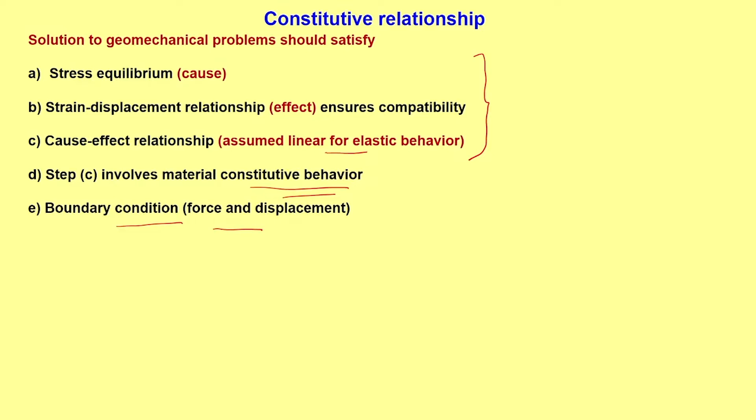Now, constitutive relationship in geomechanics is a cause-effect relationship. As I mentioned, it is an extension of the last lecture session. It is a relationship between stress and strain, or you can say it is a relationship between force acting on a material and the resulting displacement.

The real stress-strain relationship of soils or rocks may be complex in nature. Most of the time, everybody—engineer or non-engineer—will understand that soil is pretty complex and very hard to understand, and whatever we say, there will still be some gap left in our understanding. There is so much uncertainty associated with soil behavior.

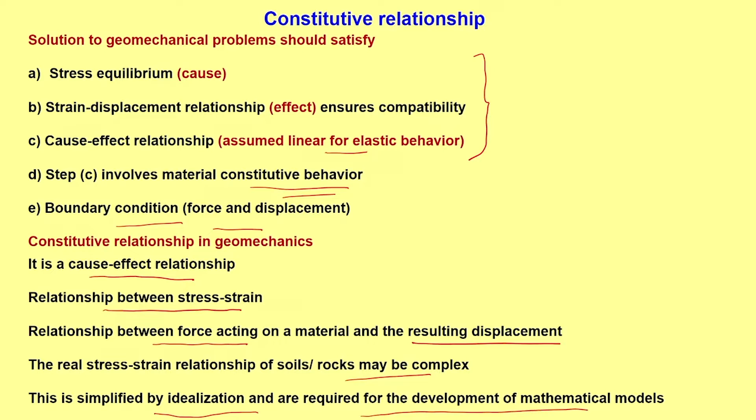So a real stress-strain behavior is beyond question. What we can do is understand or develop models which closely simulate real soil behavior, in a simplified way. We understand that it is complex, so through idealization, this relationship is simplified and required for the development of mathematical models.

So first, let us begin with a very simple model, which is linear elastic behavior. One may always ask why we should discuss linear elastic models at all in soil mechanics, because in most cases soil behaves non-linearly. But because of its simplicity, simple mathematical formulation, and minimal requirements, this model is very popular. So linear elastic model is where we always start, and there are specific problems which consider it to be elastic in nature.

Now, how far this is true is a question mark, but because of its simplicity and the fact that results are not really off, under certain circumstances we can even apply the linear elastic model for simulating the behavior of soils, but not always. It is far from reality.

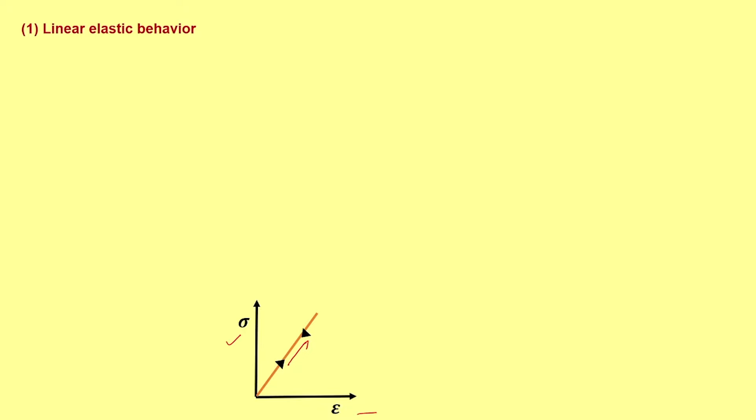So in the linear elastic model, the load results in stresses which are well within the yield limit. Now this is the point: if the loading acting on the soil is fairly less compared to its strength, we can still say that it is within the elastic limit, and this is the whole basis of the working stress method.

and the logic of applying factor of safety. We apply a high factor of safety and ensure that the stresses acting on that particular body or soil are well within, or at par with, or slightly below the elastic limit—or to be very specific in geomechanics, the yield limit.

Yield limit is the point beyond which plastic strain sets in, or plastic behavior starts happening. Let us mark up to this particular point. Now, if the same material is further loaded, it may exhibit non-linear behavior, so this point can be treated as the yield limit. We will come to that a bit later.

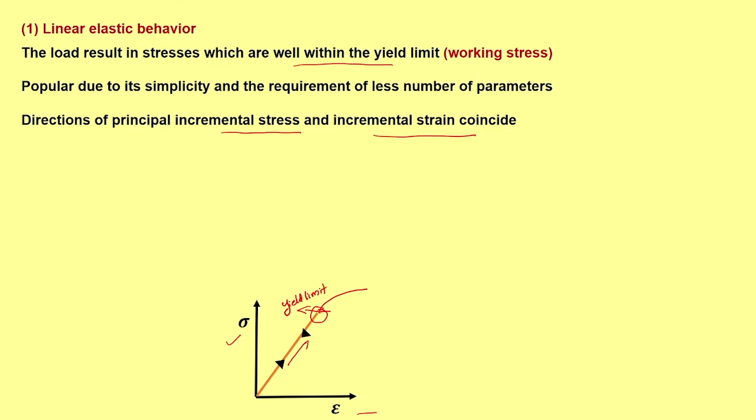There is an inherent assumption involved in most of these models: the directions of principal incremental stress and incremental strain coincide. That means the direction of the incremental stress is the same as the direction of the principal incremental strain. Now, when it comes to plastic formulations, it may or may not coincide. So there are various other elastic models, but in linear elastic models you have this inherent assumption that incremental stress and incremental strain are in the same direction.

Incremental, why incremental? We are talking about a very small increment of stresses; we will come to know why incremental is important a bit later. This model essentially corresponds to homogeneous, isotropic, low stress conditions. If we want to ensure it is a working stress condition, it has to be under low stress, with material parameters independent of stress level.

Considering this plot, the value of E remains constant up to this particular yield limit. Whatever the strain level, these are different levels of stress and different levels of strain. Whatever the stress and strain level, if the body is considered linear elastic in nature, the material parameters E and mu are considered constant, independent of stress level. So linear elastic models have only this requirement, and it essentially conforms to low stress conditions.

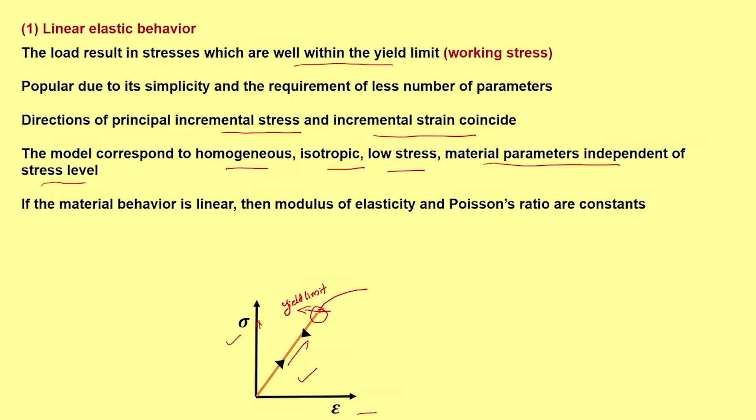If the material behavior is linear, the modulus of elasticity and Poisson's ratio are constants, as already discussed. So it does not simulate the important aspects of soil behavior. In the absence of other complex models, one can always use the linear elastic model, but with proper understanding that it will not simulate real soil behavior.

But this statement is not fully true. There are certain situations where soil exhibits some sort of elasticity, and one good example is an overconsolidated state where the soil is fairly stiff, and when stiff it can exhibit elasticity. Again, that elasticity is subject to certain conditions; beyond a certain point it again becomes subject to yield. So it is condition specific. It is not like other materials. For soils, what type of behavior it exhibits is also condition specific, and under certain conditions it can exhibit elastic behavior.

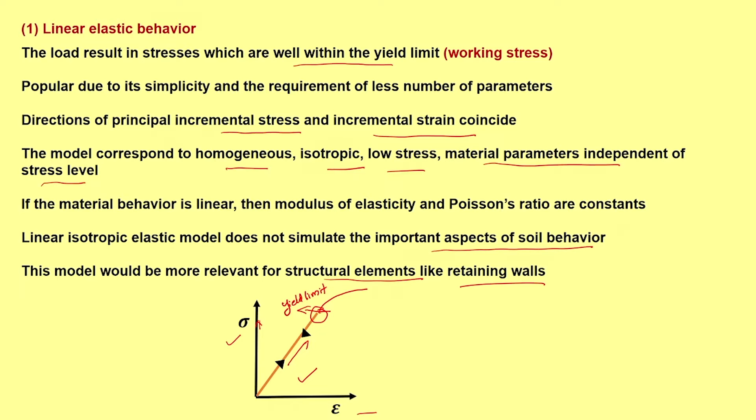So this model would be more relevant for structural elements like retaining walls, because retaining walls are very widely used and are an important aspect of geotechnical engineering. So for modeling those, linear elastic models may be important. Now we will go to some other extension of the linear elastic model.

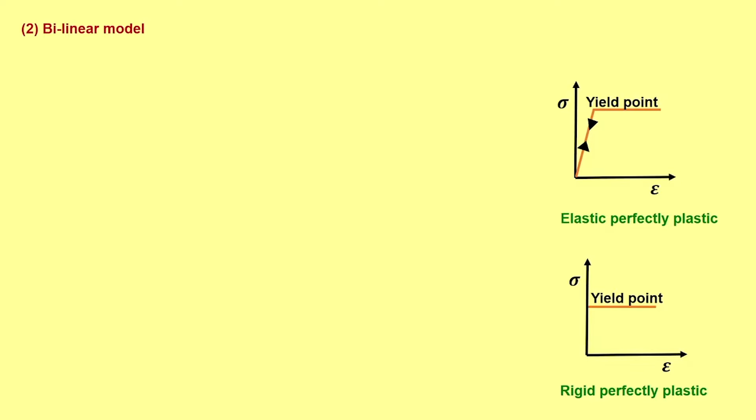Now we will come to the bilinear model. Bilinear models represent non-linearity, but you do some sort of adjustment, showing that non-linearity using two different lines - that is why it is called a bilinear model. Material behaves linear elastic until it reaches yield stress. We will discuss yielding and yield stress in detail in module 4, but here we just need to understand it is the point beyond which plastic behavior starts.

So material behaves linear elastic until it reaches yield stress, and then remains constant with strain. This means the stress-strain behavior follows a certain pattern until it reaches the yield limit or yield stress, beyond which it remains constant. Now this 'constant' depends upon the formulation, there will be some sort of changes - we will come to that in the discussion.

Material parameters remain constant till it reaches failure condition. So here we will discuss two bilinear models. The first one is elastic, perfectly plastic.

So you can see here that we are not talking only about elasticity. It is not a pure elastic model. It is elastic, perfectly plastic. It includes plasticity behavior as well. So it is not a pure elastic model, it is rather elastic and plastic response both are taken care of.

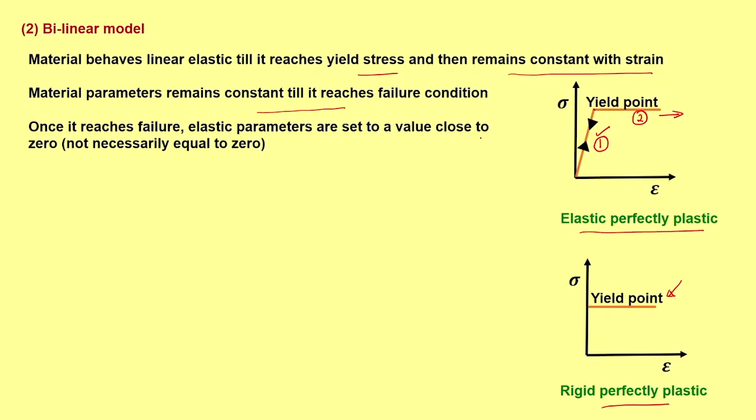Now these are different models which are used. So once it reaches failure, elastic parameters are set to a value close to 0. Now I would be very cautious to use this term, close to 0, because you will see that in certain finite element modeling, if it is set equal to 0, there will be a problem. So it is given a very small value close to 0.

That is why I have used this particular term, and we have written here not necessarily equal to 0, even though we know according to the model it is 0, but it is set close to 0. If the stress state is unloaded exactly at the yield point, it comes back to its pre-failure value, which means, at this particular point, if the unloading is done, then it gets back to its original state. So that is the issue related with this particular model.

Once at yield, it undergoes some sort of plastic deformation, but here even though it has reached its yield point, if you unload, it is bound to come back to its pre-failure state.

Elastic parameters define the pre-failure behavior. So, pre-failure behavior is defined by elastic parameters. Further, it needs parameters to define the failure surface. That is what I told you, you need to know the yield point as well.

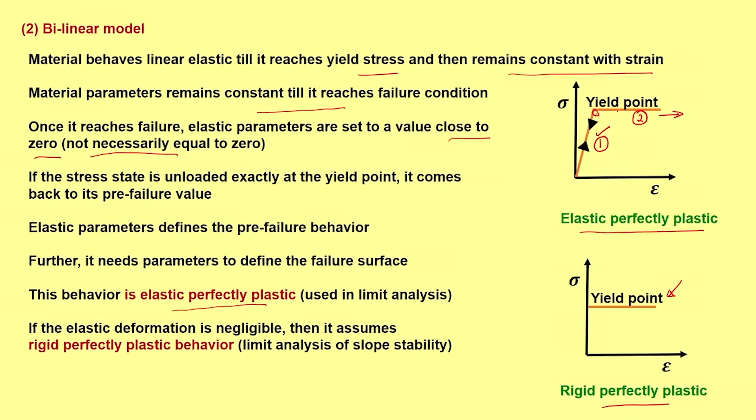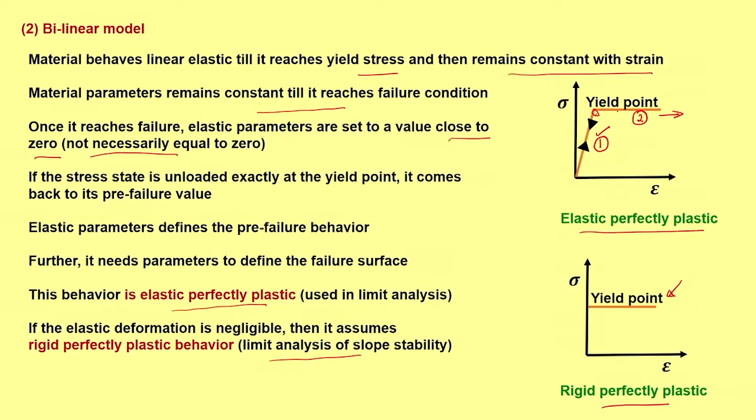used in geotechnical engineering. If the elastic deformation is negligible, then it is assumed to be rigid, perfectly plastic, only under the condition that we neglect the elastic deformation. It is so less that it is neglected, and straight away it is going to its failure. So, limit analysis of slope stability is a classical example of this.

Now, we will quickly discuss certain other models which are in line with this bilinear modeling, which is linear elastic, linear hardening. Now, I am introducing another term known as hardening behavior.

It is a typical behavior exhibited by the plastic response of a material after it reaches its yield limit, where the stress increases with strain, as you can see here. So, this particular point is the yield limit, where it shows the transition from elastic state to the plastic state. Obviously, the stiffness portion has reduced.

Now, this portion is called the hardening state, and this is the linear elastic portion, but it also tries to capture the linear hardening. So, in fact it is not linear, but here it is approximated as linear hardening. So, this is linear elastic, linear hardening.

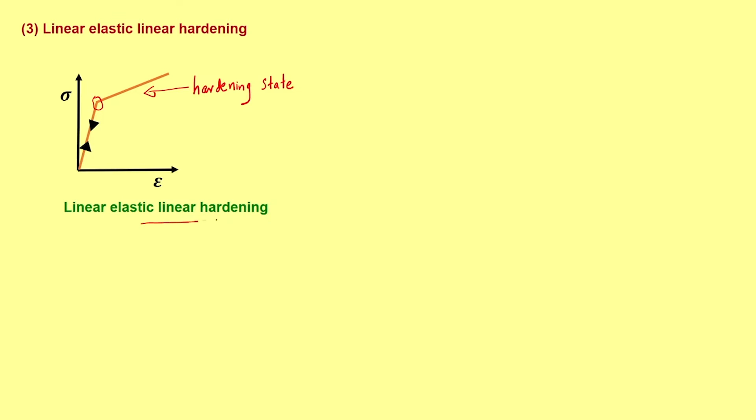Now, another aspect of it is linear elastic, non-linear hardening. This particular portion is represented by non-linear behavior. So, both capture the hardening portion of the soil behavior, which means hardening refers to a sort of volume change that is happening during shearing.

It is a kind of response. In linear elastic or the bilinear model we discussed, this portion of volume change during shearing is not incorporated. So, beyond yield point there will be a volume change. Now, this volume change results in such behavior which is hardening, or another aspect is softening. We will discuss those in detail later, but here we just need to understand this particular model takes into account the hardening behavior by certain line, and in this case it is a non-linear behavior.

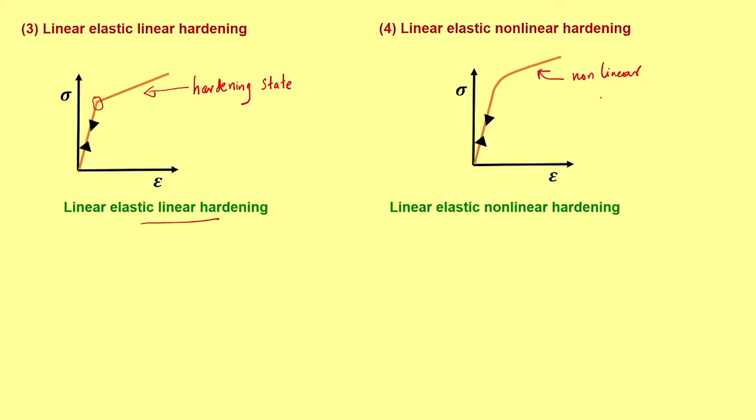We have discussed about linear elastic. Now, the next set, which is a bit of refinement over the linear elastic model, is non-linear elastic behavior, where the material response is considered to be non-linear but elastic in nature. How do you ensure this? This is a non-linear response, a curve response, but if you unload at any point of time, this particular curve traces back.

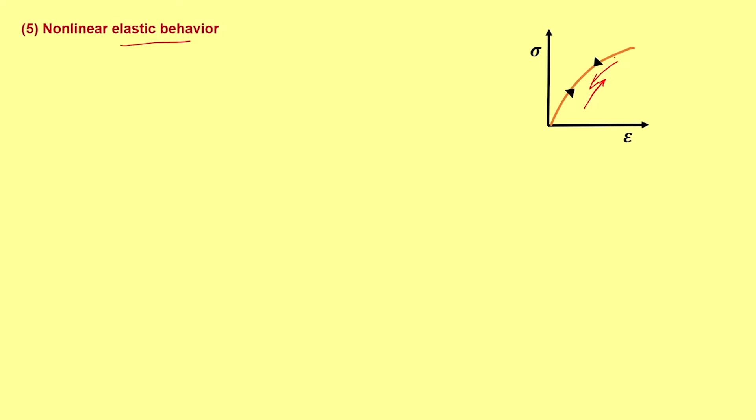So, that is one very simple definition of elastic behavior. It does not show hysteretic behavior. The manner in which you load it, it traces back. This is the loading and this is the unloading. So, non-linearity is in the curvature, it is there, but it exhibits elastic behavior. It does not result in any sort of permanent deformation, and it traces back. This is more realistic than the linear elastic behavior for soils.

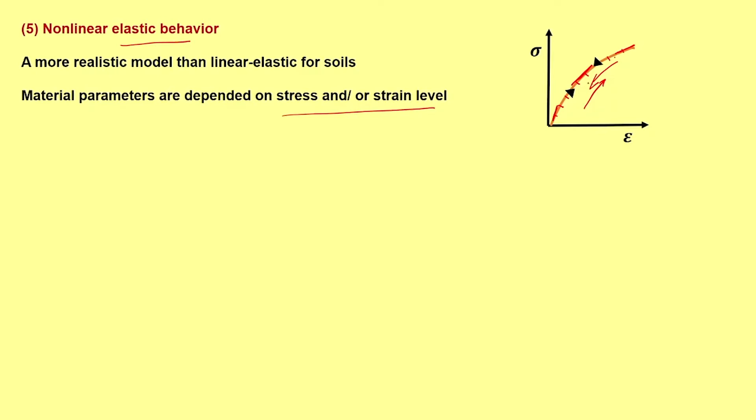Material parameters are dependent on stress and or strain level. Now, this we need to understand carefully, and that is why the incremental strain becomes important. Like at every point, if you consider along this curve and we draw a tangent at these points. For example, if I draw a tangent here, if I draw a tangent here, if I draw a tangent here, we can see that the stress by strain, or rather the elastic constant, keeps changing at every point on the curve. So, that is why we call it tangential increment.

The increment is represented by the tangent at a particular point on the curve, and that gives you the elastic constant or material parameters. So, that is what is written here: material parameters are dependent on stress and or strain level. So, if you consider this as a particular stress level or this as a particular strain level, similarly you have this as the stress level and this as the strain level. So, at every stress strain level, the material constants or parameters keep changing.

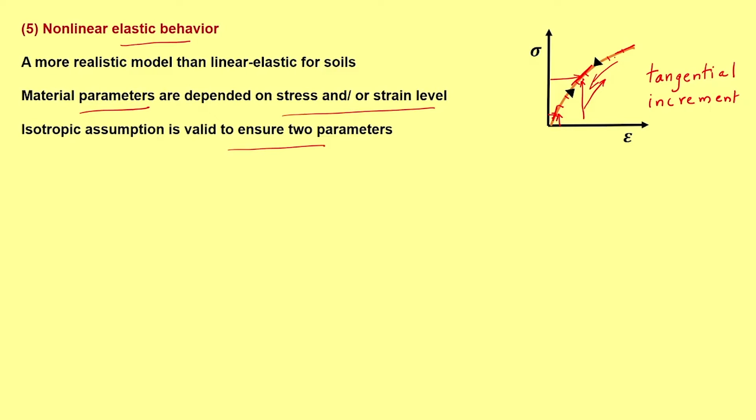So, the isotropic assumption is valid to ensure that it has only two parameters. If it is anisotropic, then again the number of parameters keeps changing, because in different directions the parameters will be different. Any two of the material properties are chosen.

Now, we know that this is an elastic analysis, and hence the very straightforward choice is E and mu, but we can also represent the model in terms of bulk modulus and shear modulus. Why specifically bulk modulus and shear modulus? Because one represents the volume change behavior and the other represents the shearing behavior, because it is associated with shear.

In soil mechanics, K and G are preferred, as the soil behavior is represented in terms of mean stress and deviatoric stress. So, when it comes to models that use invariants, it is found that mostly K and G are preferred, because of the same reason, it represents the volume change aspect and the shearing aspect.

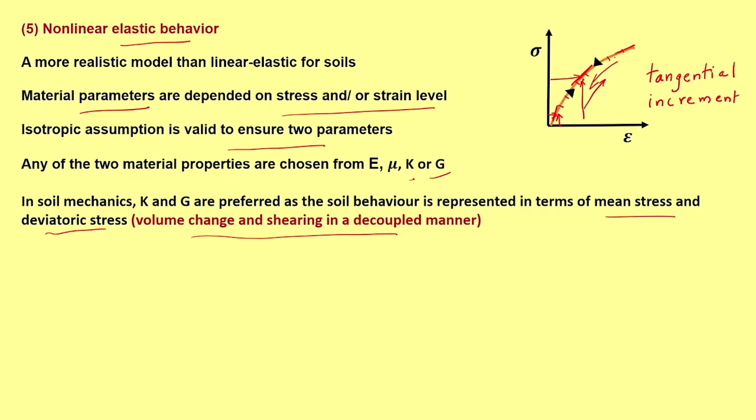We have seen in the earlier lectures that these are decoupled, which means to say from the given stress tensor, we decouple the mean stress and the deviatoric stress, and we study the volume change behavior keeping the shape constant, and we study the shearing behavior keeping the volume constant. So, these are taken one at a time, volume change and shearing in a decoupled manner, and this is purely from a simplicity point of view.

The actual soil behavior does not follow a decoupled behavior. So, that is all about nonlinear elastic behavior.

Another refinement of this is nonlinear elastic, nonlinear hardening. So, this portion gets added up. Here it is not just up to yielding, beyond yielding the hardening response is also treated as nonlinear.

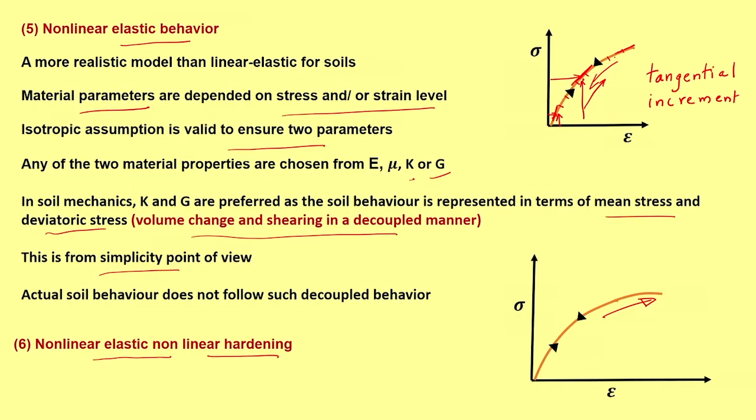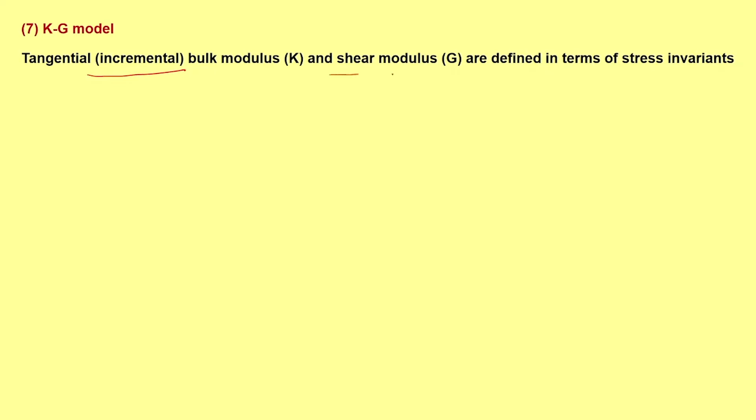Another model is the KG model, where K stands for bulk modulus and G stands for shear modulus. The tangential bulk modulus, that is incremental at a particular point, and shear modulus are defined in terms of stress invariants. How? It is defined in terms of P dash and J2. What is J2? J2 is the second invariant of the deviatoric stress tensor.

Now, probably you will understand why we discussed these invariants before. It is not discussed just for the sake of it. Because these invariants are very much used in geomechanics modeling, or to express certain models. So, these invariants are very important.

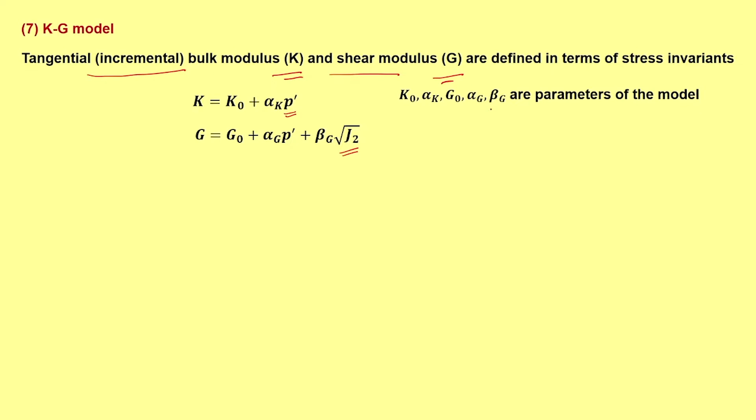So, here in the KG model, both the bulk modulus and the shear modulus are expressed in terms of stress invariants, that is the mean stress P dash and root J2, where K naught, alpha K, G naught, alpha G and beta G are all parameters of the model. So, we need to determine these parameters in order to apply the KG model.

The stress strain curve for this model is given, that is P dash versus epsilon V, that is mean stress upon volumetric strain. It is always associated with volumetric strain, and the deviatoric stress, that is root J2, is associated with deviatoric strain. So, ED here represents deviatoric strain.

So, what is deviatoric strain? The expression is given here. Again, it depends upon the various definitions of deviatoric stress or deviatoric strain, there is no specific guideline as such. Different models assume different forms of the deviatoric stress strain expression. In this particular model, the deviatoric strain is given by 2 by root 6 times the square root of epsilon 1 minus epsilon 2 squared plus epsilon 2 minus epsilon 3 squared plus epsilon 3 minus epsilon 1 squared.

So, in the stress strain curve, one important aspect to note is in P dash versus epsilon V, the slope keeps increasing in this direction, which means the bulk modulus keeps increasing, whereas in the case of root J2 versus deviatoric strain, you can see that the shear modulus keeps reducing as the soil gets more and more stressed or sheared. So the shear modulus reduces, whereas the bulk modulus increases.

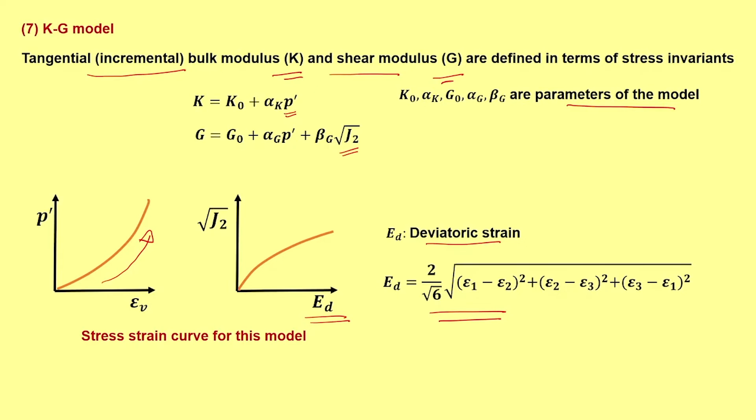So, this is a typical stress strain curve representation which we use in the KG model.

So, next is the hyperbolic model. The hyperbolic model is a relationship between accumulated stress and accumulated strain. Now, till now we have been talking mostly about incremental stress and incremental strain. Here it is the cumulative effect of stress and strain.

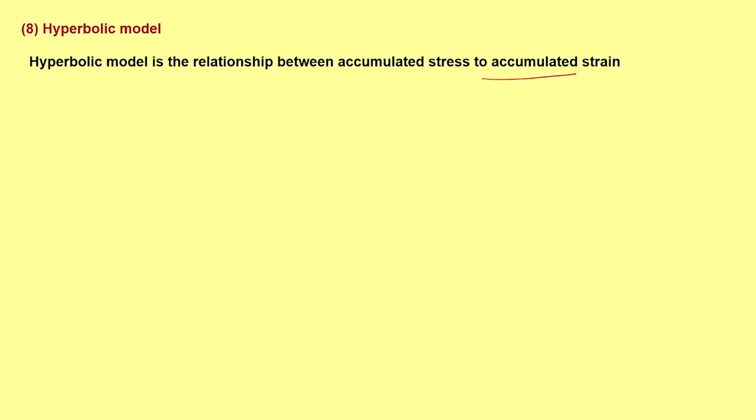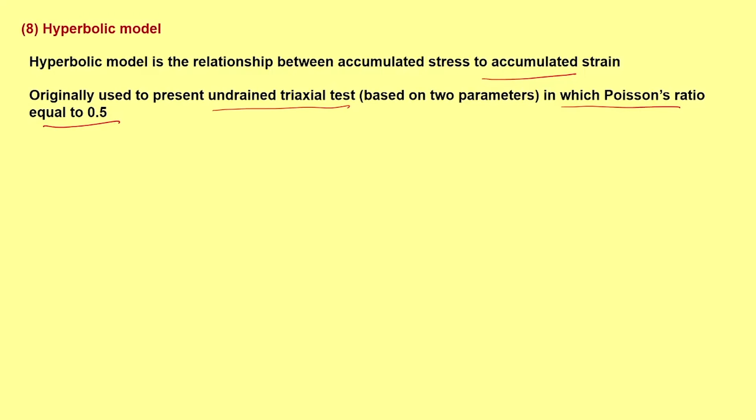It was originally developed to represent undrained triaxial test behavior based on two parameters, in which Poisson's ratio is equal to 0.5. I think you remember in the previous lectures we already discussed this point. Poisson's ratio is set to 0.5 for undrained condition. Why? Because the bulk modulus becomes infinity and then there is no volume change.

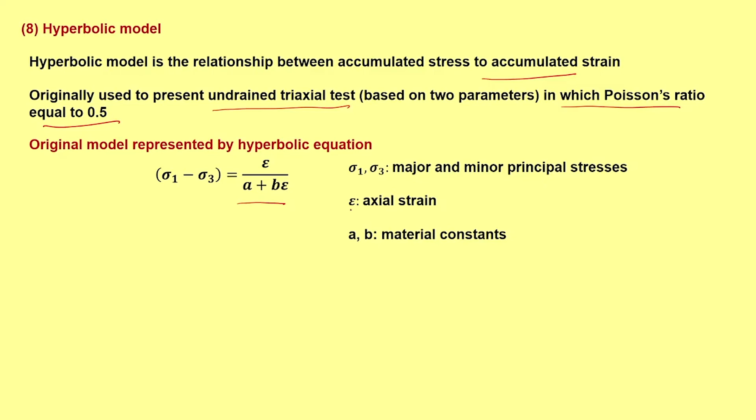The original model is represented by this hyperbolic equation where sigma 1 minus sigma 3 is the deviatoric stress, equal to epsilon divided by A plus B into epsilon, where epsilon is the strain. Sigma 1, sigma 3 are major and minor principal stresses, epsilon is the axial strain, and A, B are the material constants.

Now, it is shown that the initial tangent modulus EI is equal to 1 by A, and the failure value, that is sigma 1 minus sigma 3 F, the asymptote value, is equal to 1 by B. So both these material constants A and B have some meaning in the hyperbolic model: 1 by A is EI, and 1 by B is sigma 1 minus sigma 3 F.

So based on our stress strain data, if we can determine A and B, then the constants EI and the final value are known.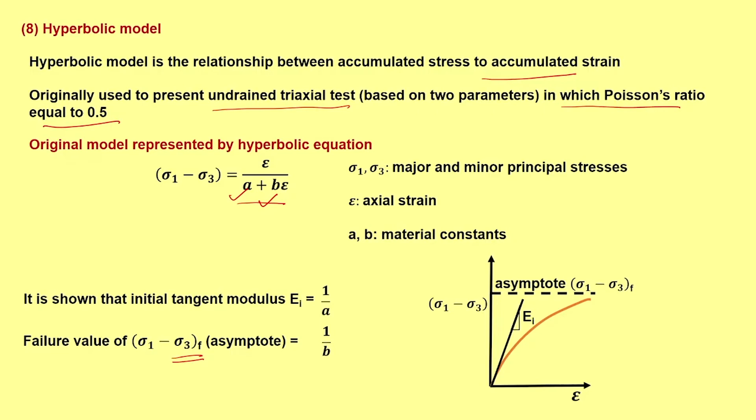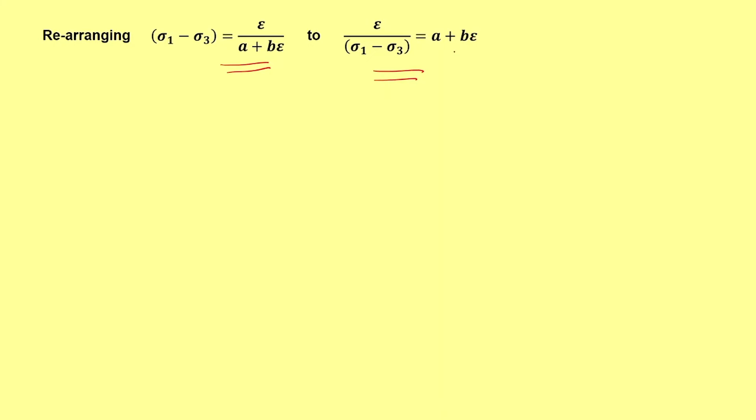So for that, if we rearrange the hyperbolic model in this particular form, that is epsilon divided by sigma 1 minus sigma 3, it is equal to A plus B into epsilon. Now, this is a linear response, A plus B into epsilon. So by plotting laboratory data in this rearranged form, A and B can be determined.

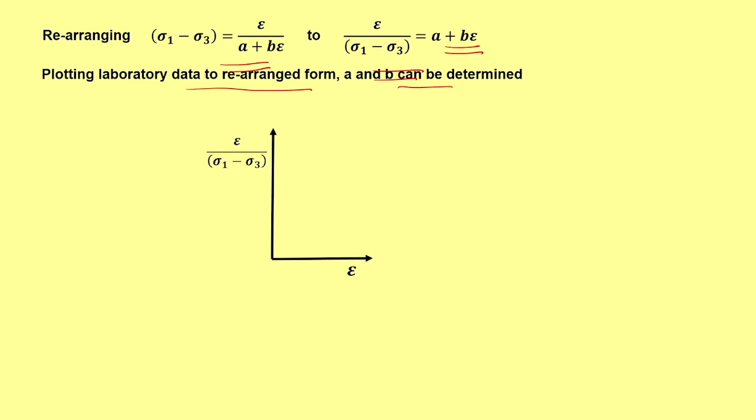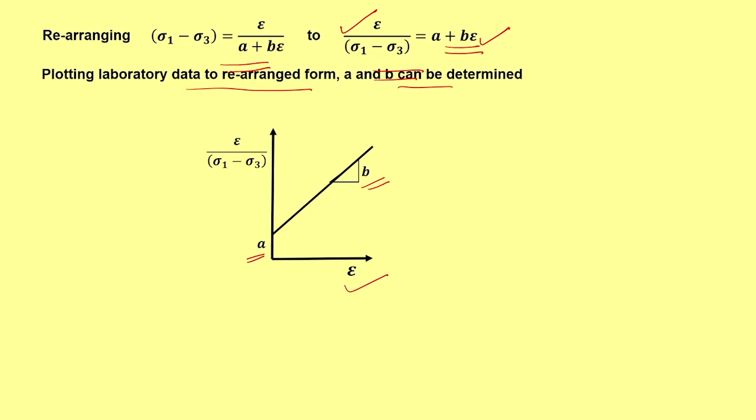How? If you plot epsilon by sigma 1 minus sigma 3 as a function of epsilon, we are likely to get a straight line, and the intercept is A and the slope is B. So once you get A and B, EI and sigma 1 minus sigma 3 at failure, or the asymptotic value, can be determined.

So another model is the small strain stiffness model. This is a relatively newer model as compared to the earlier discussed models which were very much there in the literature. This particular model is based on the understanding that the soil undergoes significant changes in stiffness when initially subjected to small changes in strain.

That means, if it is subjected for the first time, or initially, to small changes in strain, it can bring about a significant change in stiffness. Now, none of the above models we have discussed can capture this particular behavior, so this particular model has been developed.

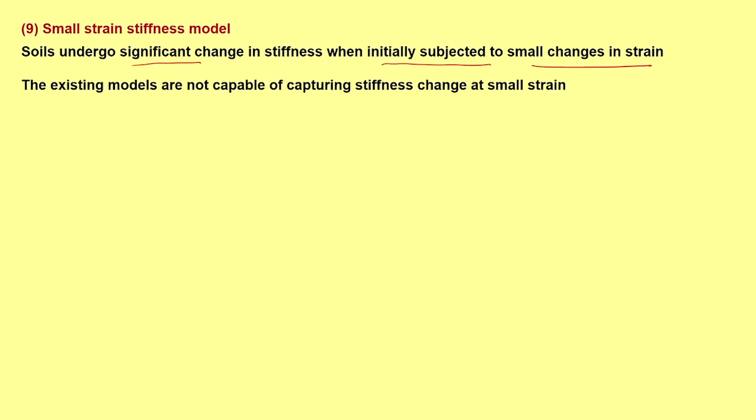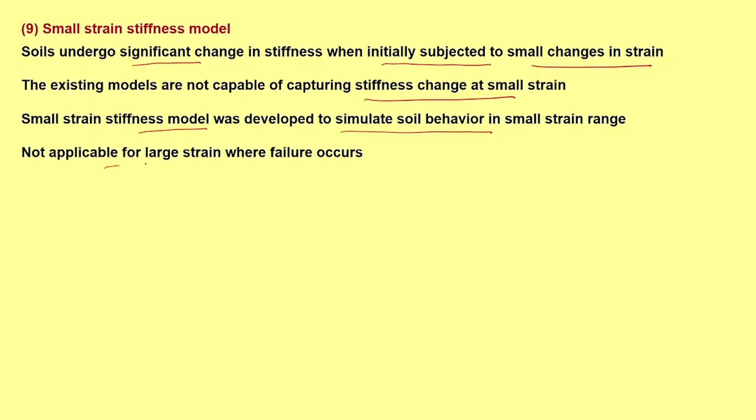The existing models are not capable of capturing the stiffness change at small strain. So the small strain stiffness model was developed to simulate soil behavior in the small strain range, not applicable for large strain where failure occurs. So frankly, we are not discussing failure in this model, we want to capture this small strain behavior.

So the variation of bulk and shear moduli are expressed as secant modulus. Now, what is secant modulus? It is expressed as G sec and K sec. So what is the secant modulus? If this is sigma versus epsilon, and it represents a nonlinear curve, this is the initial tangent modulus and this is tangent modulus.

So if I want to find out the modulus here, the secant modulus is this. So this slope is the secant modulus.

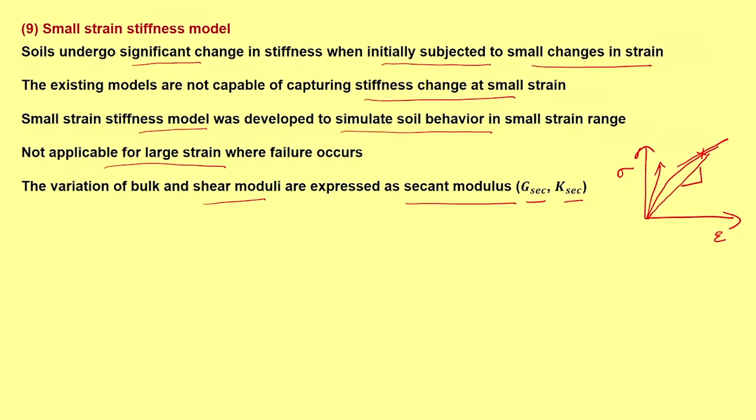So here the variation of bulk and shear moduli are expressed in terms of secant modulus, and the expression is given as G sec by p dash, again in terms of invariants, equal to a plus b cos alpha log10 of epsilon D by root 3 c, raised to gamma; and K sec by p dash is equal to r plus s cos delta log10 of epsilon V by t, raised to eta.

So there are lots of parameters along with this small strain stiffness model, so practically it becomes difficult in certain cases where the number of parameters is too large. So you need to determine all of those. That becomes sometimes a deterrent for choosing certain models, and that is why models like linear elastic models are so popular. All these are material constants, and hence those issues make these models less popular, but for capturing specific behavior one needs to go for these models.

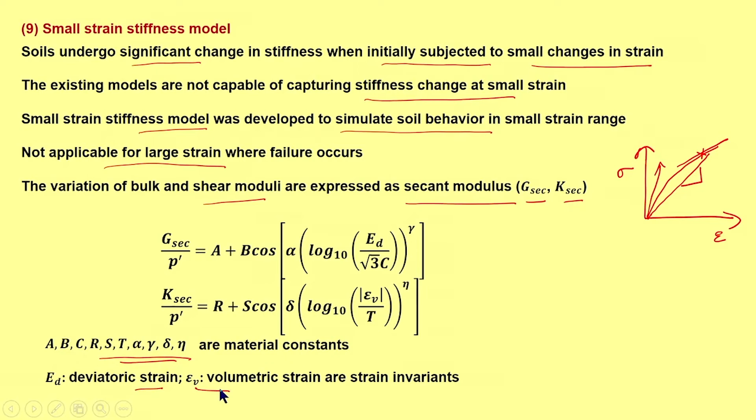So where ED in this expression is deviatoric strain, as we have already explained, epsilon V is the volumetric strain, and these are strain invariants.

Before ending this lecture, we need to discuss the real behavior and how it can be captured for problems in geomechanics, that is elastoplastic behavior, a more realistic model. A different version we discussed in the bilinear section, covering elastic perfectly plastic and rigid perfectly plastic. This is a more refined improvement, where we discuss elastic behavior, then yielding happens, and plastic behavior sets in. So: elastic, yielding, and plastic.

Now, if we try to unload it from this particular point, it is not going to trace back. That is the difference between nonlinear elastic and elastoplastic behavior. In this case, it does not trace back, rather it takes another route which is more or less parallel to the linear portion. So it comes down, and if it is loaded again, it traces more or less the same parallel path as the elastic behavior.

Why? Possibly because it has been loaded up to this point. Now, whatever loading you are making here is always less than the load which it has already been subjected to. So this is the elastic response, this is the plastic response, here it is unloading and reloading, and then beyond a certain point the plastic response sets in again.

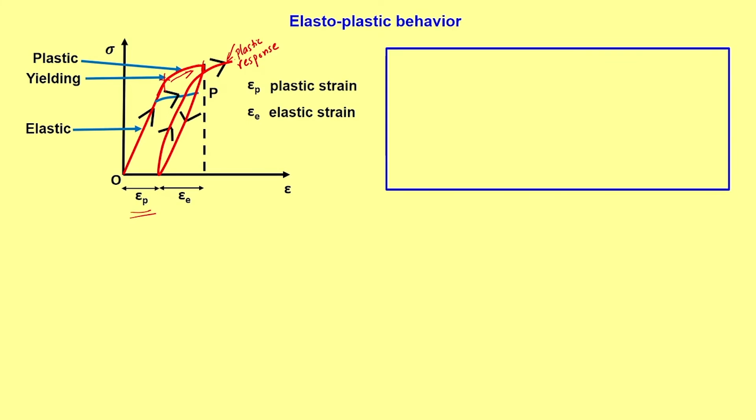So knowledge of stress-strain behavior beyond yielding is important to understand failure. We have already seen this. Unless we know where it is going to fail, it is difficult to proceed. So there is a certain behavior which soil exhibits beyond yielding, and that is captured in elastoplastic models.

The stress-strain relationship is not unique beyond yielding, which means once it has yielded, the stress-strain response is not unique the way it is for elastic response. And strain at a point not only depends on the stress level, but also depends on the loading history, that is the point P.

What it means is, let us say this is the elastic portion, then plastic deformation happens, and at this point it is unloaded. Now let us say it reaches this particular point P. So what it means is the strain at point P not only depends on the stress level. Here at this particular point, you can say this is the stress level. Now from here it is loaded, it can take this particular route to P, or it can yield and come back here, reaching point P.

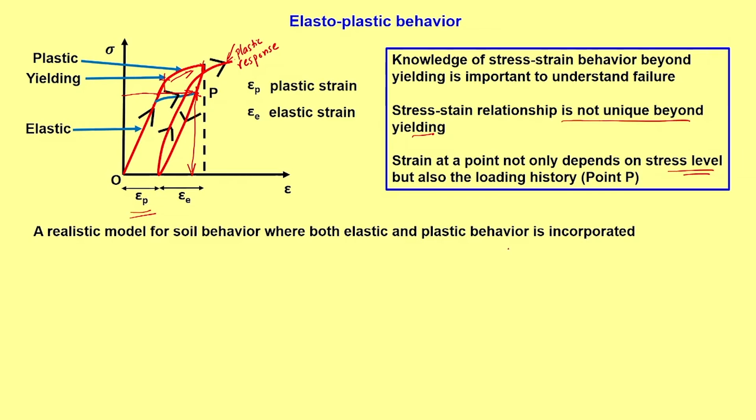A realistic model for soil behavior incorporates both elastic and plastic behavior. These models can account for yielding, hardening and softening. We will come to hardening and softening later. So here it is yielding and it is hardening.

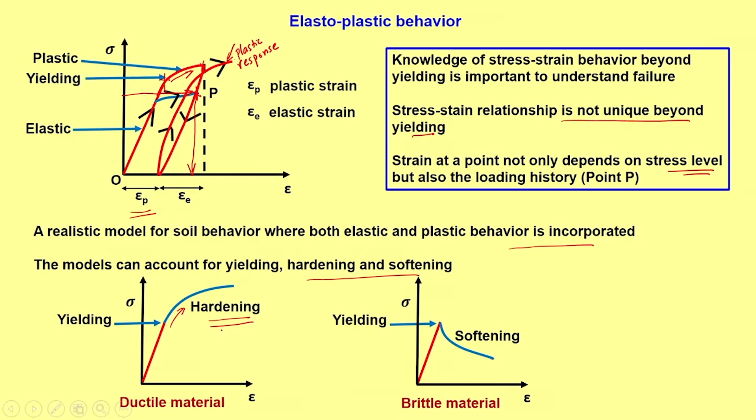This is a typical behavior of a ductile material where with stress the strain is increasing - that is hardening. In the case of softening, after yielding the stress reduces with strain, which is typical of brittle material behavior. We will see why this happens in subsequent modules. So yielding with hardening, yielding with softening - these two aspects can be captured by different elastoplastic models.

There are some similarities between hardening behavior and oedometer results. If you replot the stress strain plot like this, I have interchanged the x and y axis, so now strain is on the y axis and stress is on the x axis. You can see the same plot as before.

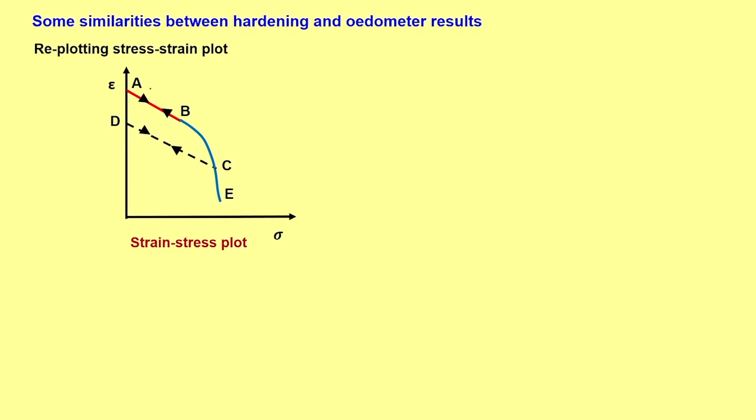So A to B and then yielding, and then the plastic behavior happens. From here it is unloaded - this is the unloading reloading path CD, which is more or less parallel to AB. Now if you compare this with a given oedometer result, you can find there is a sort of similarity.

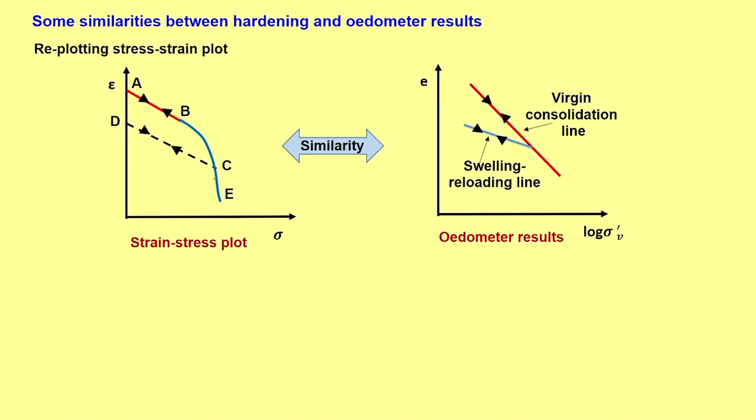Here it is e versus log sigma v dash. This is a very popular representation of oedometer results, where you talk about the virgin consolidation line and swelling reloading line. This particular response is more or less similar to this behavior, whereas the swelling reloading line mimics this other behavior - similar to the unload reload plot of this stress strain behavior, CDC.

So you can consider this as the yielding point, which is somewhat similar to here, or maybe similar to here. The swelling reloading line is similar to the unload reload plot, that is CDC of the strain stress plot, since it is plotted on the y axis. This line and this line closely resemble each other, and the way they respond is also similar.

CDC exhibits elastic behavior, so does the swelling reloading line, and it has something to do with the stress history. The virgin consolidation line induces permanent plastic strain, beyond BC - this is the yield point.

So beyond the yield point, it induces plastic deformation, and the same is the case with the virgin consolidation line, where permanent settling happens. This is similar to the yielded strain hardening behavior of BCE - this is the yield point and this is the hardening behavior BCE. So this and the virgin consolidation line behavior are the same.

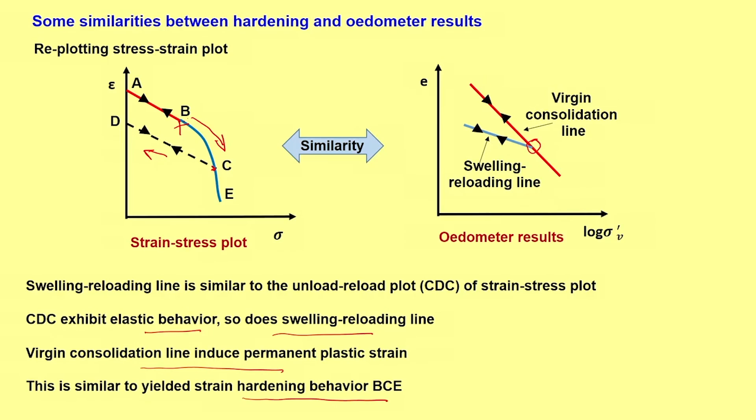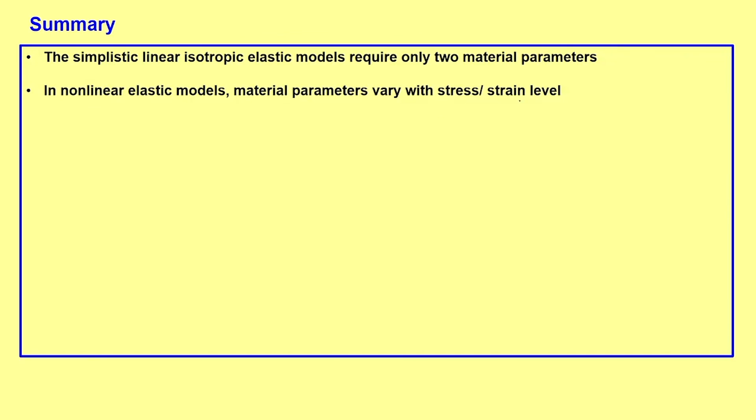To summarize today's lecture: simplistic linear isotropic elastic models require only two material parameters, which is why they are simple. In nonlinear elastic models, material parameters vary with stress strain level, whereas in the linear elastic model it is constant. Nonlinear elastic models cannot capture the volume change behavior of soils during shearing - we are talking about the hardening and softening behavior.

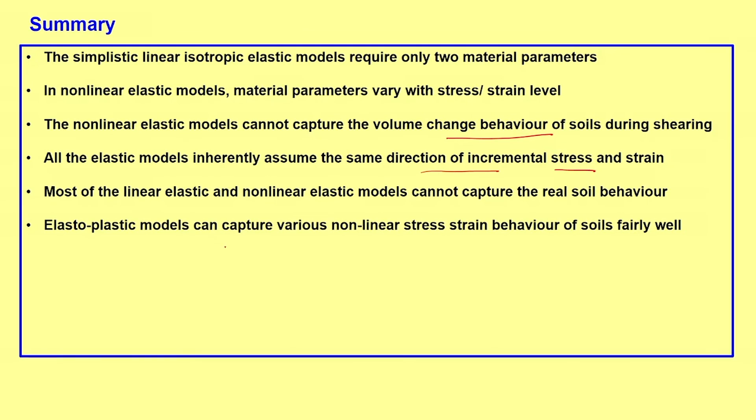All the elastic models inherently assume the same direction of incremental stress and strain. Most linear elastic and nonlinear elastic models cannot capture the real soil behavior, as we have already explained. Elastoplastic models have been developed to capture the nonlinear stress strain behavior of soils fairly well.

It can account for the strain hardening and strain softening response during shearing, and beyond yielding, the behavior of soil is not unique. But having said that, we also need to keep in mind that as we proceed from linear elastic to elastoplastic models, the complexity of mathematical solution increases and the computational effort also increases - that we have to keep in mind.

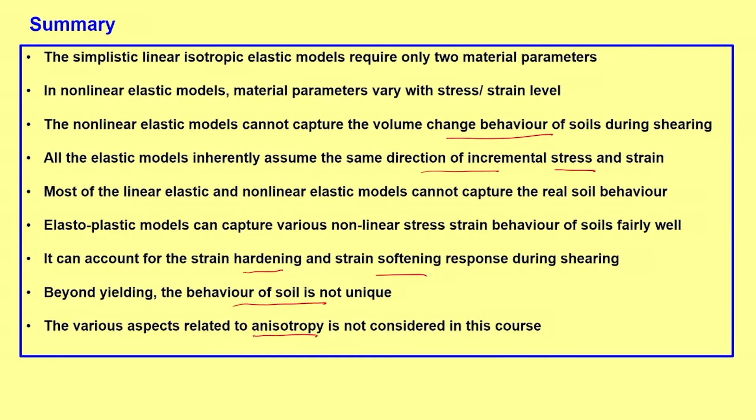The various aspects related to anisotropy are not considered in this course, so mostly we will confine our discussion to isotropic soil behavior. That is all for this particular lecture.

We have just discussed some important aspects of the cause-effect relationship in terms of constitutive behavior, or constitutive model behavior - different models which relate stress and strain. But let me make a point here that this is not an exhaustive discussion; there are several aspects beyond what we have discussed. This is only for you to get oriented towards such constitutive behavior.

With this we will end this particular lecture. Till now we have been focusing mostly on the three-dimensional aspect. Now, for actual problem solving, we need to transform this 3D to 2D behavior for simplicity - for certain problems one can always idealize a given 3D problem to 2D. That will be seen in the next lecture.